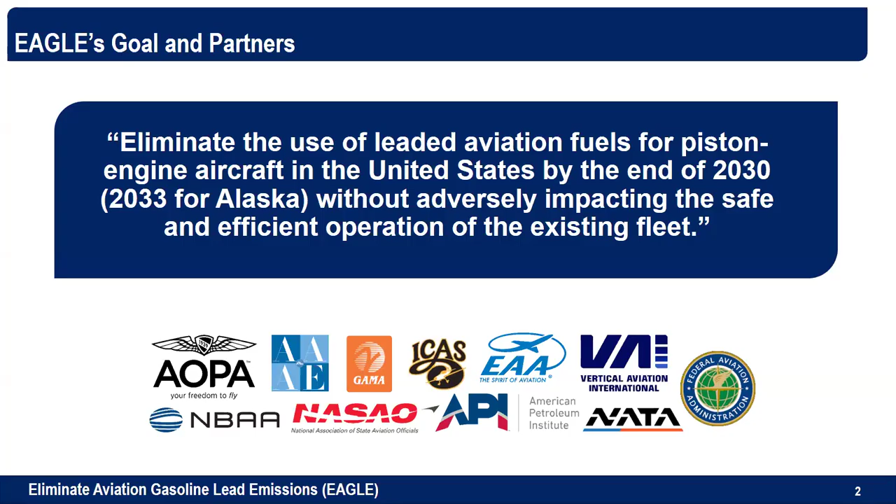When EAGLE was formed in February of 2022, these national partners joined the FAA in agreeing to 4 key objectives: facilitating stakeholder support for development and deployment of viable unleaded fuels, developing technical solutions to mitigate impacts on the existing fleet, informing regulatory processes and policies to safely and smartly eliminate lead emissions, and protecting the availability of 100 low lead during the transition.

FAA reauthorization legislation that was enacted last year made great progress toward that 4th goal by requiring publicly obligated airports to maintain access to 100 low lead through the end of 2030, or the end of 2032 in Alaska.

Although we continue to see state and local actions attempting to prematurely outlaw the use of leaded avgas without a commercially viable replacement fuel, EAGLE's work has helped steer those attempts towards the 2030 timeline, and as an organization, we will continue to do so.

Recently, we've begun to see STC fuels entering the marketplace, mostly in California, where there's a strong environmental focus. Clear communication on FAA processes and coordination with industry have never been more important from our perspective, and the work of EAGLE has never been more relevant, even as we transition to a new administration in Washington.

I'm joined today by industry colleagues from the National Air Transportation Association, NATA, the General Aviation Manufacturers Association, GAMA, the Aircraft Owners and Pilots Association, AOPA, the Experimental Aircraft Association, EAA, and the Vertical Aviation International Association, VAI, all of which will provide technical updates and answer questions on EAGLE's progress towards our mission and key goals.

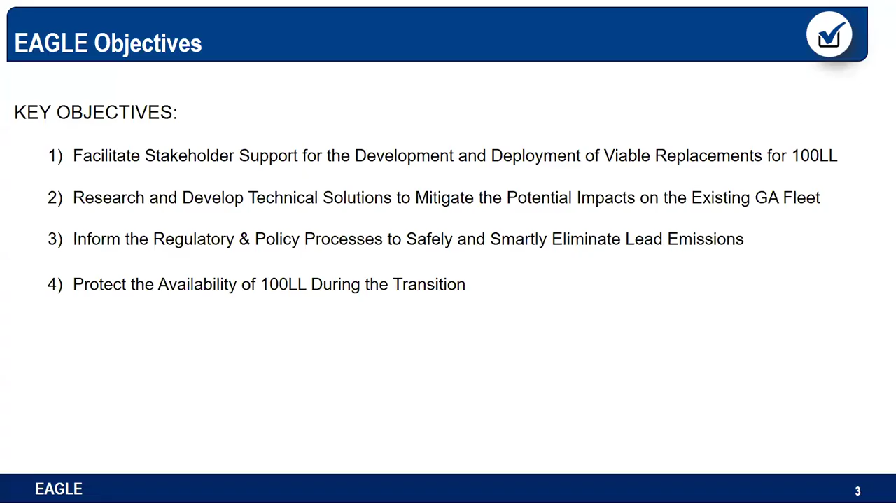I'd like to turn it over now to Rob Hackman from the AOPA, who will highlight the key elements of a viable replacement fuel and the process of a national transition.

Well, thank you, Kurt, and everybody, appreciate everybody joining us here on Saturday. If anybody's interested, I'm drinking Tim Hortons coffee this morning. So hope everybody has a good cup of coffee on their end.

So with that, Kurt mentioned we're working towards a viable unleaded replacement for 100 low lead. What does a viable unleaded replacement mean? It may mean different things to different folks, but first and foremost, it has to ensure safety. We have to maintain the safety for the engines and aircraft as we transition to any new fuel. That needs to be paramount, and it needs to be a fuel that is acceptable for use in the industry.

Part of that also has to take into consideration the production and distribution of the fuel. This has to be a solution that works across industries for the petroleum producers, the supply, distribution, the end users, consumers, and the like. And for the consumers, a big part of that obviously is the economic consideration of any new fuel. Not just cost per gallon, but what does it cost to transition to the fuel?

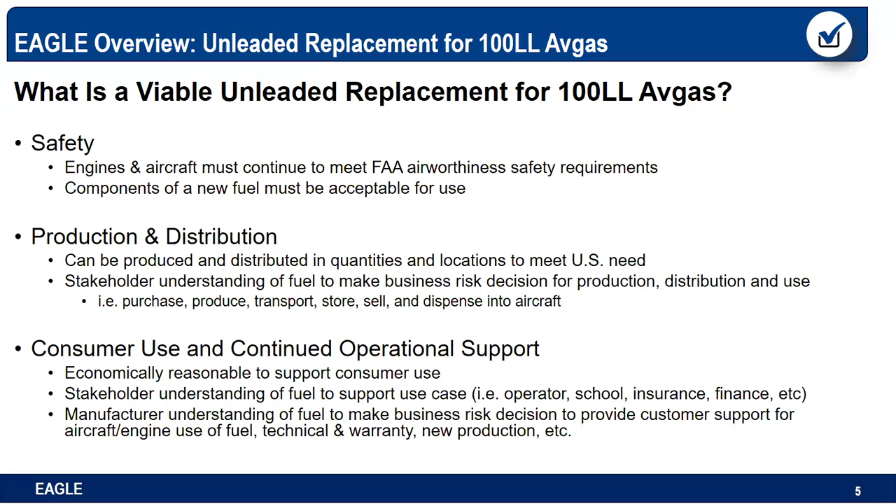In order to do that, we need to make sure that we have good stakeholder involvement and stakeholder understanding of any of the new fuels. Also needs to include all the users, flight schools, fleet operators, and the like. And our manufacturers, our OEMs, our aircraft engines and airframe manufacturers need to have a good understanding of the fuel in order to be able to support new production, to be able to support technical questions that come up, and warranty issues as well. So those are some of the key concepts that go into determining what is a viable, or how we define a viable and unleaded replacement fuel.

To give everybody kind of a visual as we get into this, we're going to go into a lot of detail into each of these sections, but this is a visual presentation of what we're talking about and the pathway that we're working on to undertake this.

It all starts with the fuel developers. The fuel developers are the key to seeing what new fuels are available to us.

The FAA provides two different pathways for fuels to become authorized for use in our aircraft. We're going to spend a lot of time on both of those pathways today and give you updates specific to each of the fuels pursuing these pathways.

The first pathway is the fleet authorization pathway. This came about in 2018 in the FAA reauthorization bill, which authorized the FAA to issue fleet authorization without an applicant for a new fuel's approval. This realized that new fuels coming forward may be coming from sources that were not traditional to the certification process, such as fuel producers and the like.

So this allows the FAA effectively to be an applicant. It relies heavily on the PAFI testing, the Piston Aviation Fuels Initiative, which you'll hear more about in just a second, and also the industry consensus standards process, the ASTM production specification, to get the peer review for the process. That results in a fuel being issued a fleet authorization. We'll talk about what that means to each aircraft owner and the maintenance folks here.

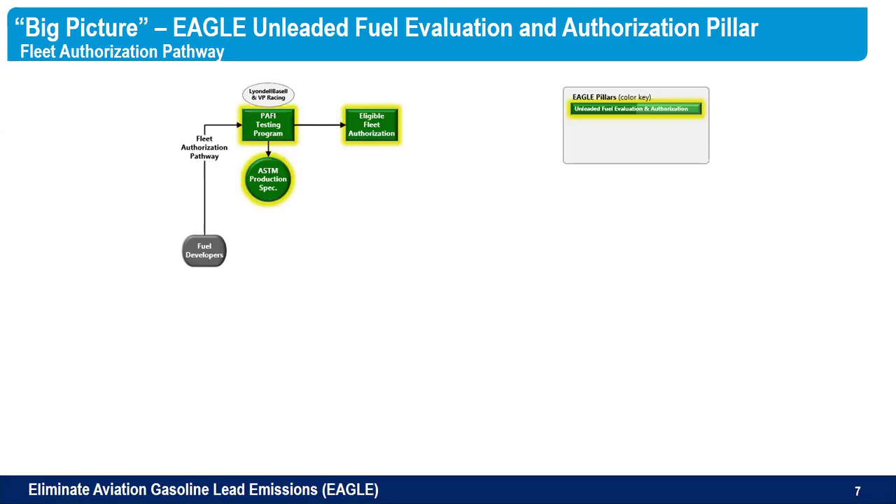The second pathway is the traditional pathway, the existing type certificate pathway. In this case, a supplemental type certificate as a change to add a new fuel to aircraft. This relies on the STC approval process, which is a proprietary process agreed upon between the FAA and the applicant. More detail on this to come.

It relies on either an ASTM production specification or an independent specification developed by the company. In either case, the specification has to be accepted by the FAA as part of the STC approval process, resulting in a supplemental type certificate. What we're seeing is what is called an approved model list supplemental type certificate. So instead of an STC issued for each make and model, it's a large approved model list that includes many airframes and many engines - an STC for both the engine and then an STC for the airframe itself.

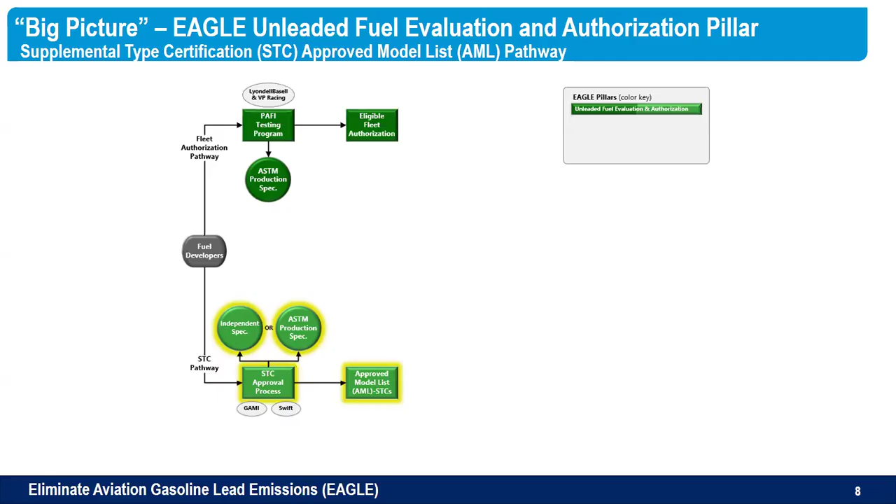From there, we get into the owner-operator and the approval process. In either case, the fleet authorization or the STC pathway, both result in something that needs to be installed on the aircraft. In the case of the STC, most folks are familiar with installing an STC onto an aircraft. Whatever modifications need to be made as part of that STC, including manuals, aircraft manuals, fuel placards, those types of things - you're purchasing that STC from the STC holder and then installing it per the directions.

In the case of the fleet authorization, you will also be installing that authorization. Similarly, it will include fuel placards and flight supplement manuals for the new fuel and any other modifications that need to occur. In this instance, the FAA will be issuing it - you will not have to purchase it, being one of the main distinctions. In both cases, any aircraft modifications that need to be considered are part of those directions. In the case of the fleet authorization, there will be additional information provided for the experimental amateur built community to help them transition to a new fuel.

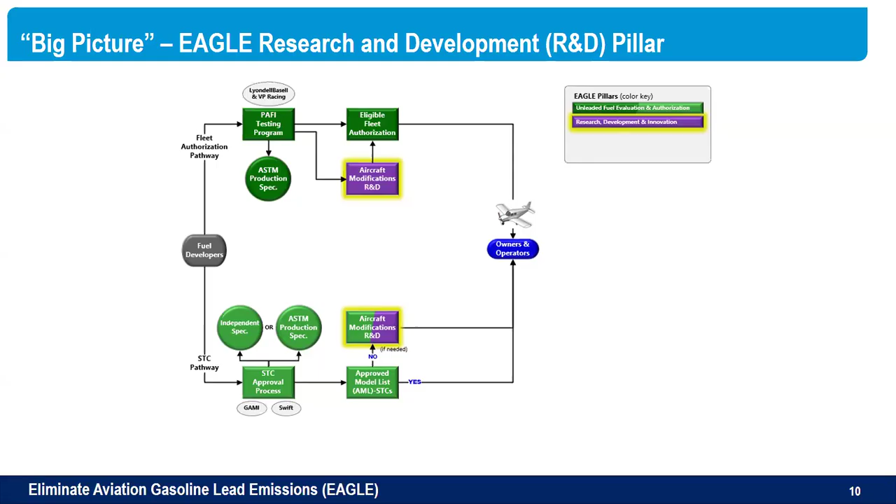A key component, as we mentioned before, in determining a viable fuel is ensuring that production and distribution is also considered throughout this. So as the development of the fuels is going on, as the authorizations of the fuels are actually being worked through, producers and distributors need to be a critical component of this.

In the fleet authorization pathway, they are part of the group developing the test methodologies, the PAFI testing and the like, and are kept in the loop through the ASTM process, as well as the ASTM production specification being developed and balloted through the process. So the producers, distributors, FBOs, and the like are kept informed as to progress being made and information about the fuel development.

In the STC pathway, it's still critical that this happens, but it relies on the STC applicants, who are working with proprietary information between the FAA and the applicant, to go out and keep the producers, distributors, and FBOs informed. So one is a bit more of an open and collaborative process, and one is designed to be a bit more of a proprietary process.

We have one fuel working through the fleet authorization pathway that we'll have an update on today - that's the LyondellBasell and VP Racing fuel. We have two fuels working through the STC pathway - that is GAMI, General Aviation Modifications, Inc.

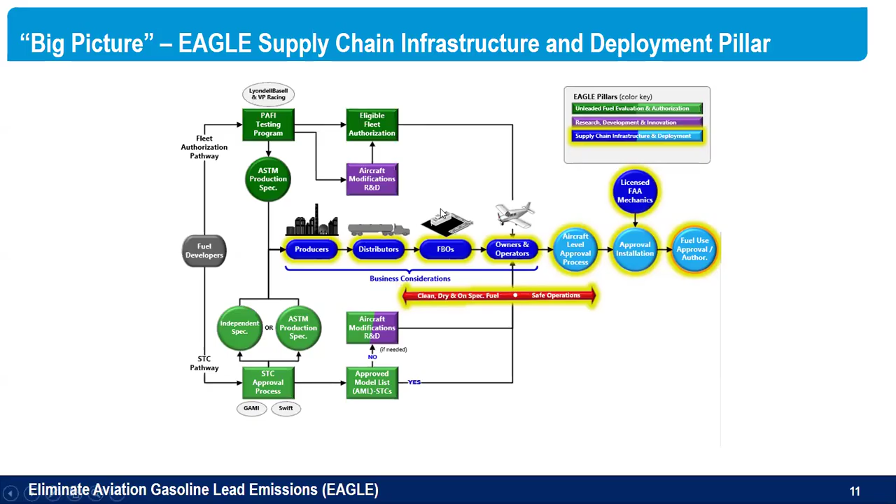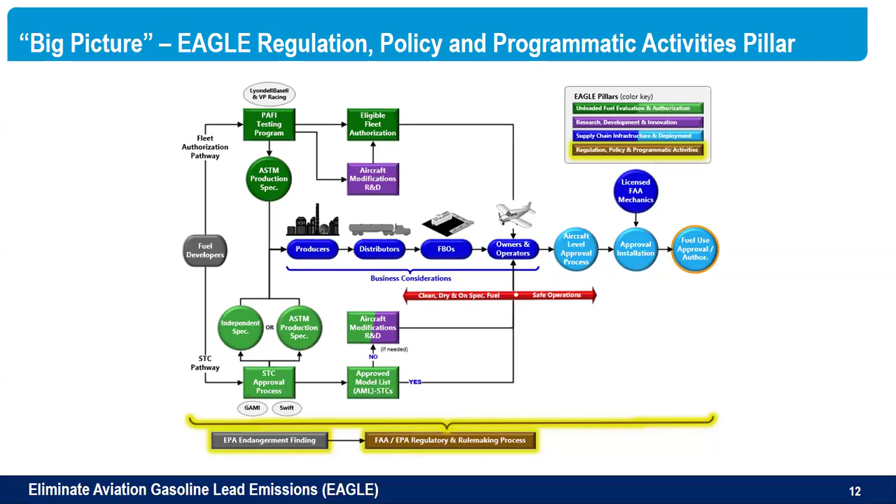As this is working through, at the bottom you'll see the EPA endangerment finding and the FAA/EPA regulatory and rulemaking process underway. As most folks are aware, the endangerment finding has been issued, so now we're working through any potential future FAA and EPA rulemaking that will come out of that. We're anticipating that over the next few years. We're working collaboratively with the FAA through the EAGLE process, and they in turn are working with the EPA as it moves ahead. That's intended to give an overview of the process, a visual you can keep in the back of your mind.

At the end, once the approvals are issued and installed on the aircraft, we'll talk a bit about the responsibility for maintenance in the field. Obviously, the last thing is a strong continued operational safety environment as any fuels enter the field, to ensure we're addressing any issues that arise. That's a key component.

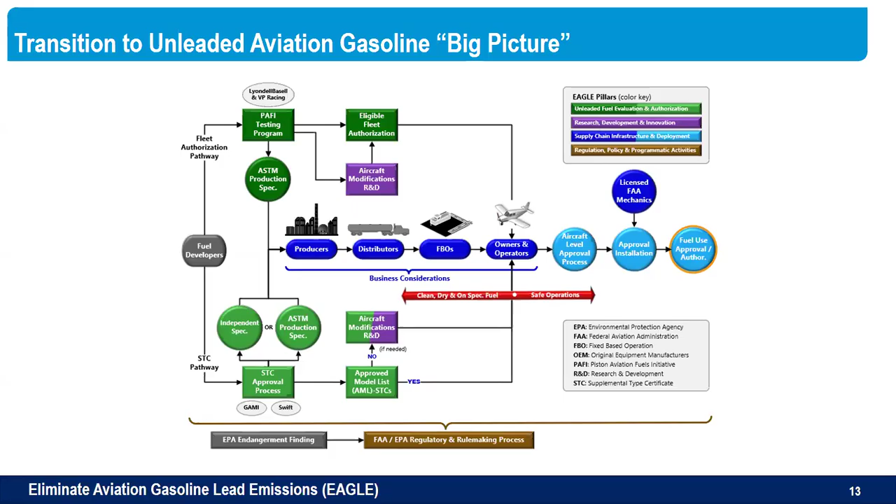We're going to spend the next 45 to 50 minutes going into detail on each of these. I think that's what a lot of you are actually interested in. The first thing we'll talk about is those two pathways and what some of the key differences are. I'm going to bring in Walter Desrosier from GAMA to join us, and he and I are going to tag team a little on the various fuels.

Walter, what are you drinking this morning? Coffee? All right, well, good morning everybody. I am originally an A&P mechanic, so my focus is on high-leaded, high-test coffee. I drink a dark roast Starbucks black coffee, no sweetener added. But good morning everybody, welcome, and I appreciate the opportunity to walk through and talk through some of these issues with you.

So Rob talked about, on the big picture chart, the different pathways by which you can obtain FAA's approval or authorization in order to use a new fuel. One thing to highlight is the FAA's focus and emphasis is on the safety of the engine and the safety of the aircraft, ensuring they continue to meet all applicable airworthiness requirements. That's what the FAA is focused on as part of those processes.

There are two pathways, as Rob said. One is the supplemental type certificate process, the traditional process on how we do all our modifications and alterations for major change on aircraft through the type design process. As he mentioned, there are two applicants. I'll talk a little more about their status and where they are going through that process.

The second one is relatively new and unique to fuel. Congress passed authorization allowing the FAA to recognize that in this area of fuel, most of the expertise and all the development is done by the fuel, petroleum, and chemical companies in industry, and they're experts in that field, but they are not product development and aircraft certification experts with the FAA. So there was kind of a gap in terms of their ability to invest in the development of potential candidate fuels that could be considered for use in engines and airplanes.

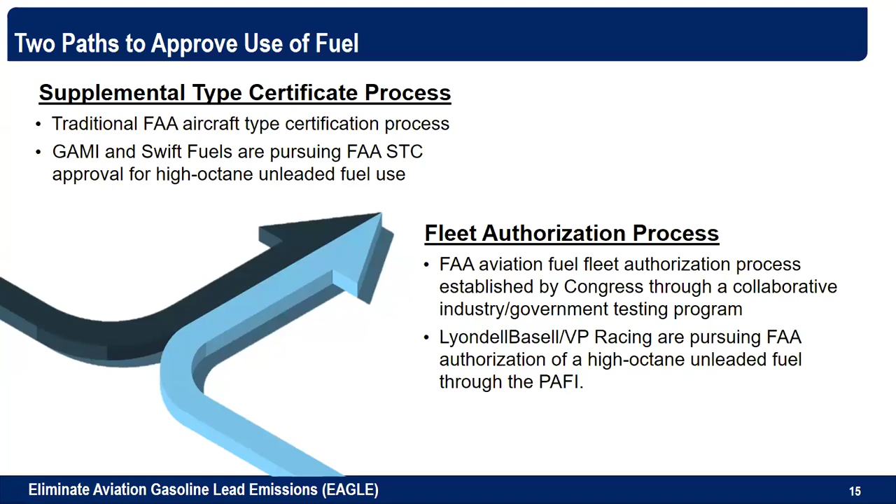So in that process, Rob mentioned that a supplemental type certificate is just like every traditional type certificate process under the FAA. It is a proprietary applicant working directly with FAA. They make application just like a traditional manufacturer does. GAMA members that make Cessna airplanes, Lycoming engines, make application directly to FAA. Those are proprietary activities where they engage. The traditional certification process requires that the applicant show compliance to all the requirements necessary for safety to meet the airworthiness requirements, for example, Part 23 airplanes, Part 33 engines. But the applicant controls the visibility of all the required tests, evaluations, and assessments they do to show compliance. FAA does their traditional certification process, reviews that documentation, and makes a finding that the applicant has shown compliance to issue the FAA design approval, whether it's by TC, amended TC, STC, or in this case, the AML STC.

The applicant then can choose and control the visibility of all their data, what testing they did, how they showed compliance. That is all applicant proprietary data that they decide how they want to share and communicate and provide visibility to. Likewise, if they're using a company specification as part of their STC, this is the independent specification, then the applicant controls the visibility and availability of that as part of their design approval.

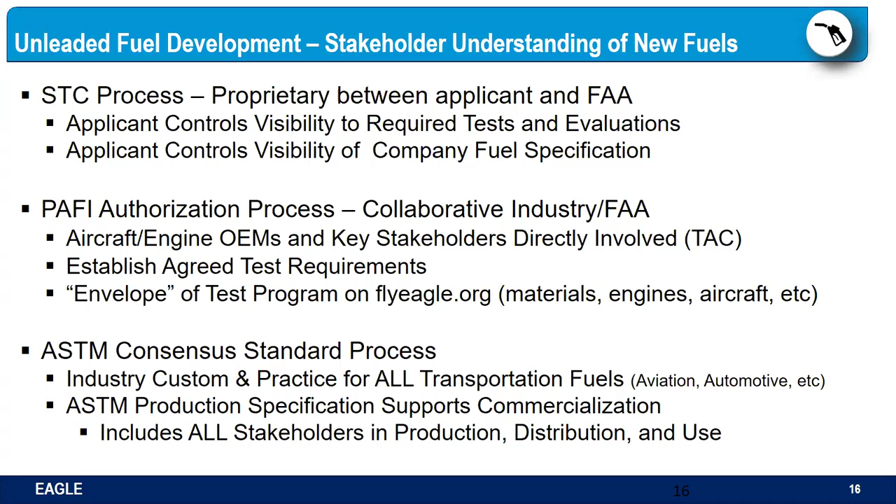And the only time that we used the STC process from a fuel standpoint widespread was the introduction of autogas, and that was for a portion of the fleet, not for the entire fleet. UL94 has an STC approval as well. But manufacturers also do approval of new fuels through their respective processes as well.

So one of the elements we also wanted to talk about, it's not just about the test and evaluation and the authorization and approval of the FAA for the fuel itself to be used in engines and airplanes. One of the important aspects is the importance of it being installed on the engines and aircraft that it's intended for.

This is an important part of the FAA's traditional process in terms of ensuring the continued safety of the fleet. So for a fuel that is approved and authorized through the traditional certification process, an AML STC is issued for the fuel. Every AML STC or multi-model STC does include a limitation in it: the installer must determine whether the design change is compatible with previously approved modifications.

Now, the reason that's important is that as part of the type certification process, you have to have a known configuration that you're assessing and evaluating. So when they did the STC, they evaluated the base configuration of a type engine and a base configuration of a type aircraft and determined that it would be eligible and safe to operate.

It is not possible to take into consideration how many different independent third-party modifications and changes might exist out there. And so the original STC as issued is only going to focus on the base configuration. This is the standard method and mechanism for installing changes on an aircraft.

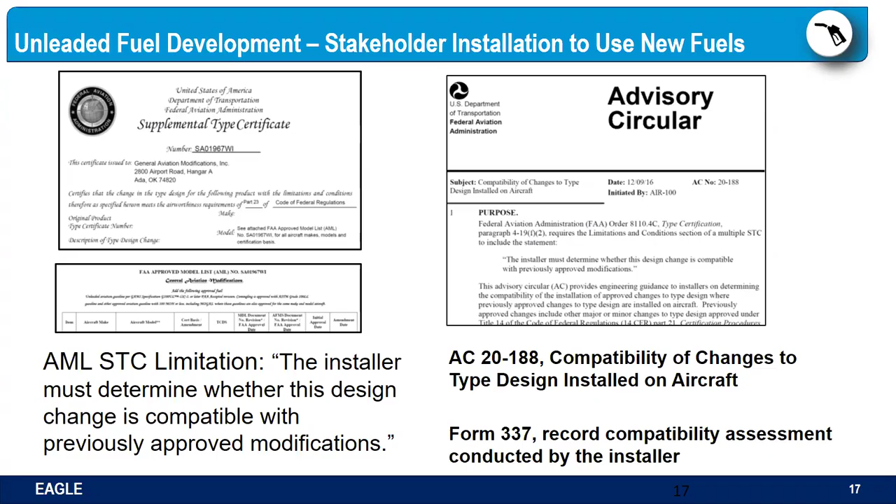Now those will be done by field approval or by some kind of minor or major alteration. However, if it rises to a certain level, it might require an additional STC or a change from a type design perspective. The fleet authorization is envisioned to provide a bit more information and perhaps additional input for these folks. So thank you for that.

So I talked about how there's broad industry and FAA engagement in developing the data as part of the fleet authorization. That data is generated, encompasses a lot of information, and supports two things. Fleet authorization does require an ASTM specification, so the data generated provides support for those reports to be reviewed by all the stakeholders in the consensus standards process of ASTM.

And through that process, the peer review will provide additional input and understanding on the fuels, and might request additional data to be generated or substantiation to be developed. But as part of that process, the FAA also uses all of that data that comes out of the PAFI testing and the ASTM consensus and peer review process to make its determination on aircraft engine and aircraft eligibility.

So what the FAA will do, once they've determined they have a viable replacement fuel based on all the PAFI testing, the ASTM consensus process, and stakeholder support and approval of a production specification for a new fuel, the FAA will then generate - based on all that data, just like an STC - a determination of the applicability of all the airworthiness requirements for the engine and aircraft to meet safety requirements.

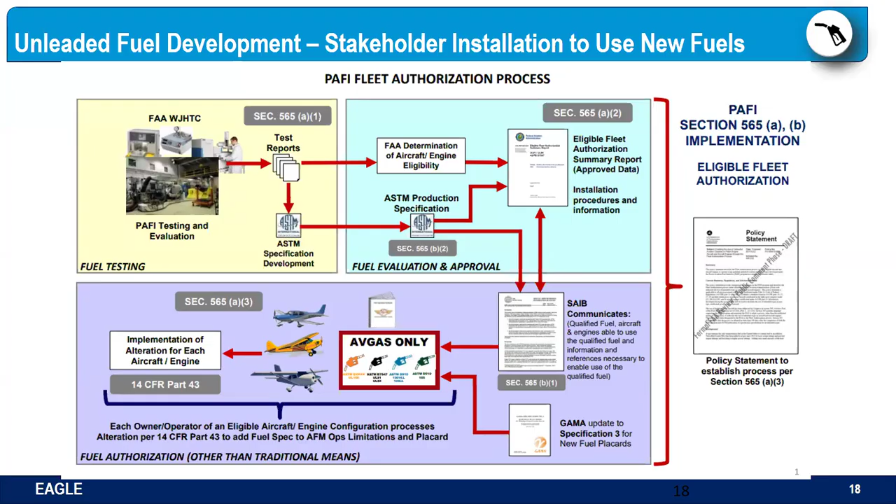So Walter, we're going to move into the next phase here, where we talk about the fuel applicants and give an update on each of the three. Just as a reminder to everyone, we have two fuels working through the type certificate or supplemental type certificate process: GAMI with their G100UL and Swift with their 100R. And then we have a fuel working through the PAFI fleet authorization by the FAA, which is the VP Racing Lyondell Basell VP Racing fuel. So we're going to give an update on the status of each of these three.

So I'm going to start with the STC fuel. As Rob mentioned, GAMI has obtained an STC, AML STC approval and authorization for the use of G100UL, which is their trade name for that new fuel. The current STCs that have been issued, you see the STC number on the screen there.

But for every fuel, there's going to be two approvals needed. You need an approval to change the limitations on the engine, authorizing it to use a new fuel, and you need an approval to make a change to the aircraft limitation, authorizing the use of a new fuel. So there are two AML STCs that have already been issued to GAMI. They are very broad in terms of a fleet. The Part 33 engine AML, as reported, basically includes all spark ignition reciprocating engines. I haven't done a side-by-side comparison to every single type certificate the FAA has ever issued, but it is a very, very broad AML STC in which GAMI has shown to the FAA that they've got the data that helps support that, and the FAA has issued that STC.

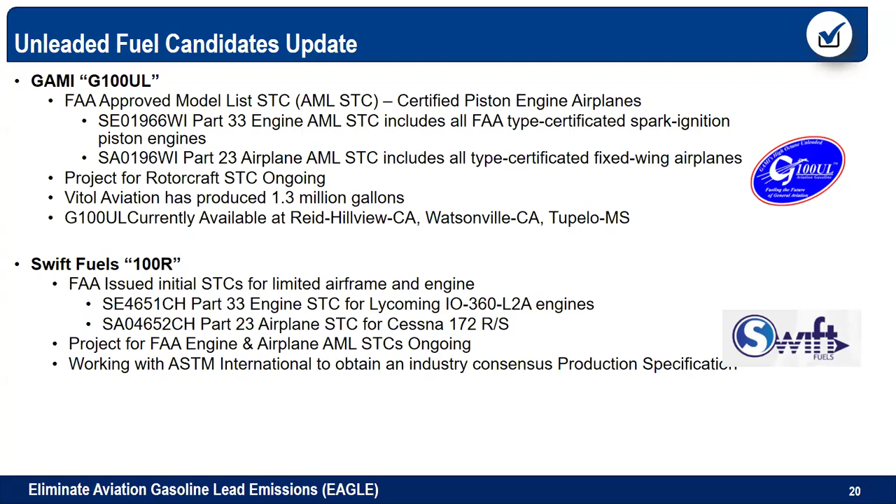In terms of Lyondell Basel VP Racing, they have a candidate fuel that they're developing, putting a lot of research and development into like the other companies, but they are not a traditional aviation company. They're not somebody who has done FAA certification projects. They're not an organization that has made application to the FAA for any kind of STC in the past.

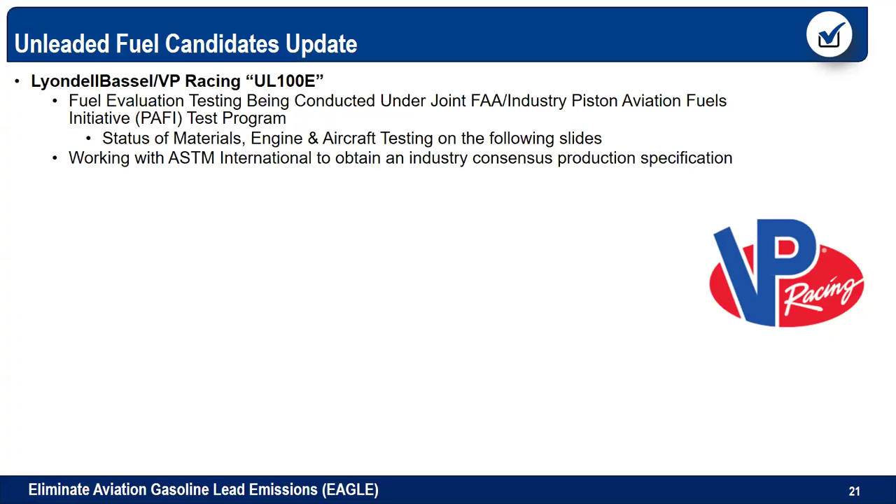So they're pursuing the pathway made available under the fleet authorization. And that's exactly why that process exists, to support the developers of fuel, to bring them in and invite them with a pathway to market to invest in development of something for general aviation. They're going through the PAFI program and the test program. Because we're involved as stakeholders in that program, we do have a lot more details on that, so we're going to go through that process a little bit to provide some understanding and visibility.

Yeah, so it is something, Walter. I'll give you a chance to grab a drink there.

So we do have a lot more visibility into this. This is the Lyondell Basel VP Racing UL100E that is going through the fleet authorization process, which utilizes the Piston Aviation Fuels Initiative. This is the program whereby the testing was defined by a collaborative effort through the manufacturer, the users, the community, to put the program together to determine the envelope that needs to be tested to understand the parameters of the fuel. The testing itself is being done either by the FAA or overseen by the FAA as part of the PAFI program. So folks were wondering where the fuel is actually being tested - we'll show you here in a little bit where fuel is going out to and give you a lot more detail on this particular fuel.

Thank you, Rob. So in terms of the PAFI test program, that test program was developed in cooperation between stakeholders, primarily aircraft and engine OEMs, but other stakeholders involved in the aviation fuel process, and the FAA. There's some initial gates in terms of eligibility. We've had over 26 fuels come into the PAFI program over the years, go through some of those initial assessments and evaluations. Based on some of the experiences and lessons learned in that process, we've strengthened the program to do a quicker job at identifying critical characteristics in testing new candidate fuels that come in. So that's what the program is set up as today.

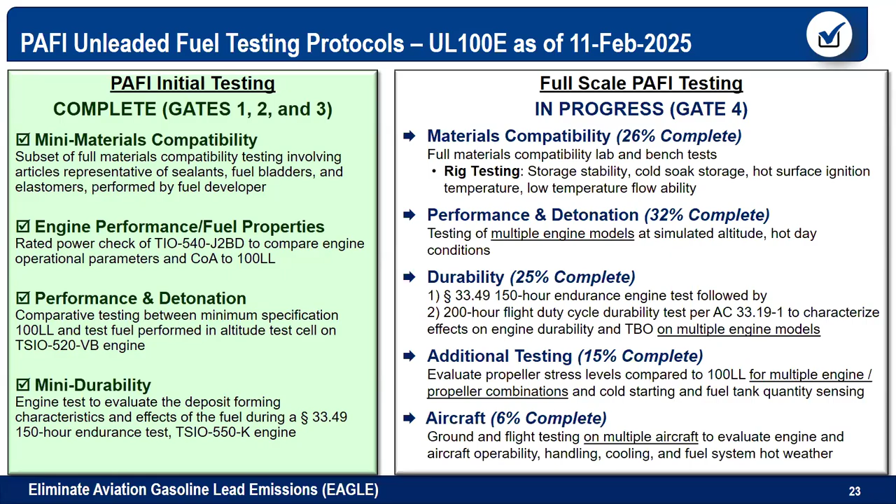They are now in gate 4, which is full-scale PAFI testing. And we're going to do full-scale materials, performance and detonation, durability, some additional testing, and some aircraft testing. So this kind of has a summary and shows a percentage complete, but our next slide shows a graphic representation that really is telling in terms of the comprehensiveness and the scope of that evaluation and assessment.

Likewise, below that, you can see the durability and performance category. That's where we take a lot of new components and constituents in these fuels - we don't know exactly what the performance might be when subjected to the extreme temperatures and the extreme limits of demands that are put on aircraft engines.

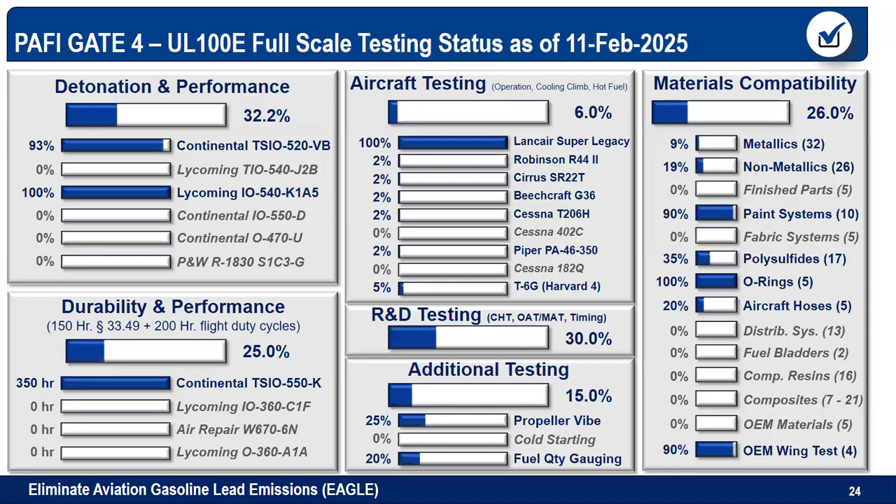Under the PAFI program, we've done as comprehensive an approach as we could in bringing together inputs from across all the manufacturers and from across the other stakeholders involved in the distribution chain to identify all of those materials that we think would be key contributors needing assessment.

As I mentioned earlier, all that data is generated, and it feeds into the FAA determining an eligible fleet determination, feeds into the consensus standard process for an ASTM production spec. It also feeds into those areas where we identify a potential impact. Say there's a material where we identify a potential impact - it feeds into one of the branches that Eagle has, an R&D area of activity. If we identify anything in the fleet that might be impacted by one of the characteristics we identify in a test for our fuel, we're then going to use that data to support an additional level of work to generate some kind of mitigation or solution.

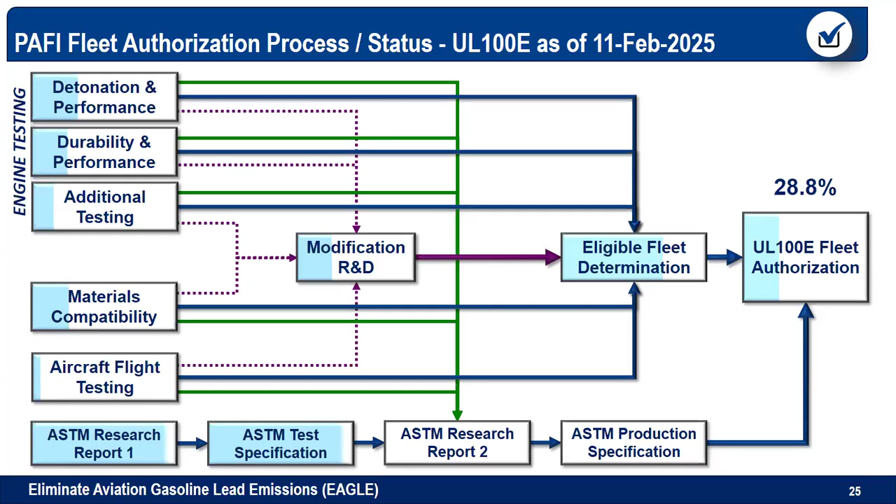It might be a change in operational characteristic. It might be a change in material. It might be a coating that you put on certain materials, or it might be information to support an additive to be added to the fuel. But if there's an impact anywhere, that's part of the Eagle process and part of the PAFI test program - to feed into understanding a potential impact and how we address that.

We talked about who is actually doing the testing, overseen by the FAA. So I mentioned we're just starting the aircraft full-scale testing, and all of that testing is being done as an in-kind contribution by the different aircraft OEMs. On the chart here, you see all the OEMs directly participating, plus the FAA's William J. Hughes Tech Center, plus Embry-Riddle Aeronautical University as a participant doing some work there, plus an air carrier, Cape Air, doing some of their commercial piston-powered airplane testing as part of their program.

And then NRC Canada is actually doing the radial engine testing, and Hartzell Propellers is doing the vibration testing. So you can see notionally, this shows approximately how many gallons for each of those tests, and the scope and size of the test, depending on how many aircraft each of them is testing.

This goes to show the extensive cooperation across industry with the FAA in conducting the testing and support, but also the comprehensiveness of the test in terms of the volume of fuel needed to do the evaluation and assessment of these new fuels.

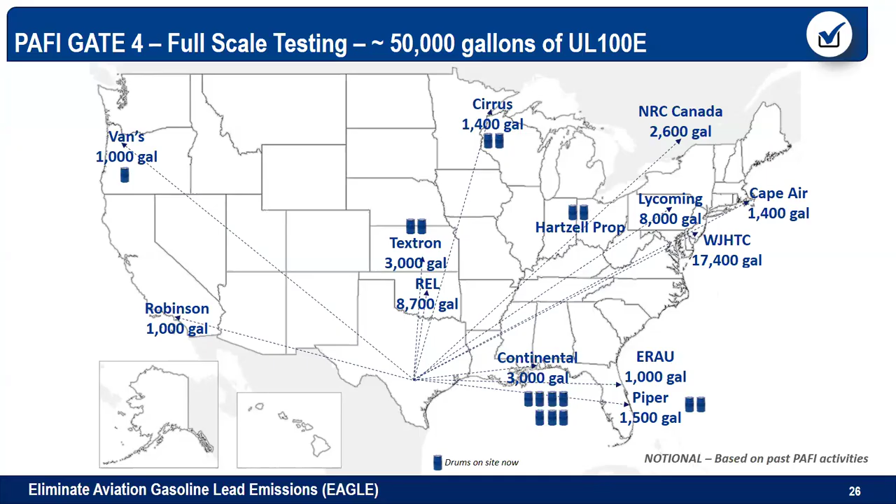Walter, we talked about materials compatibility. All of these materials we're going to show here, this entire list is available at flyEAGLE.org, but it highlights the extensive areas we're looking at from a materials compatibility standpoint and the work actually being done. So you're seeing paint system.

I also wanted to highlight for our amateur built community, a number of these materials are not necessarily found in production aircraft. They were added. The group that put together the testing includes a kit manufacturer, a number of kit manufacturers, as well as outreach to other manufacturers of amateur built aircraft kits. So we're including that in there.

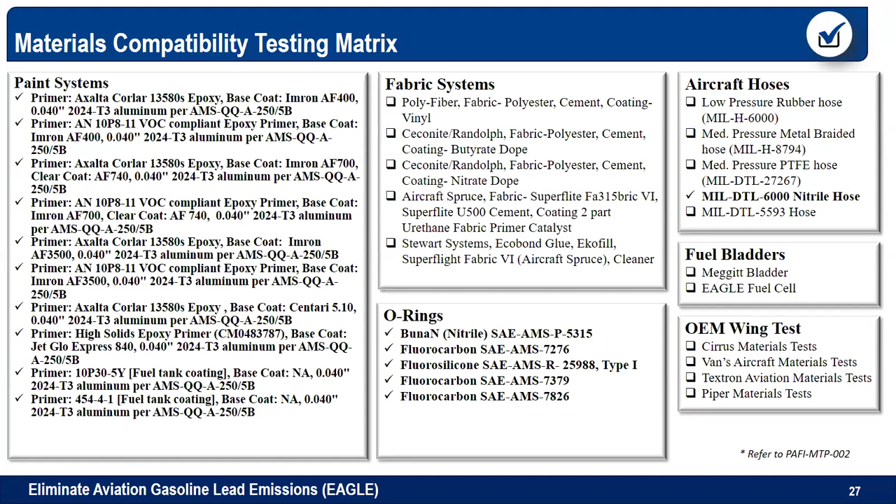So you see paint systems, fabric systems, hoses, bladders, O-rings. On this next one, the metallics, the non-metallics, a lot of OEM parts, finished parts. We also go through polysulfide sealants, a lot of our tank sealants, a lot of our different materials. So these are all being tested.

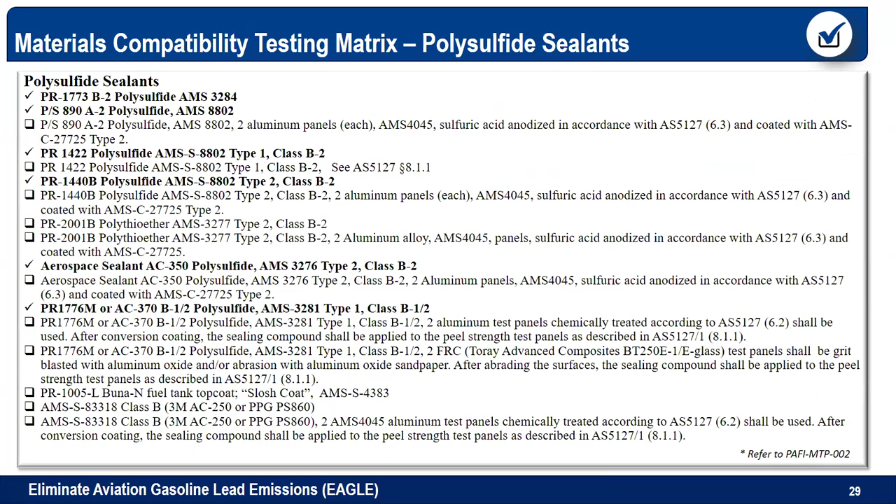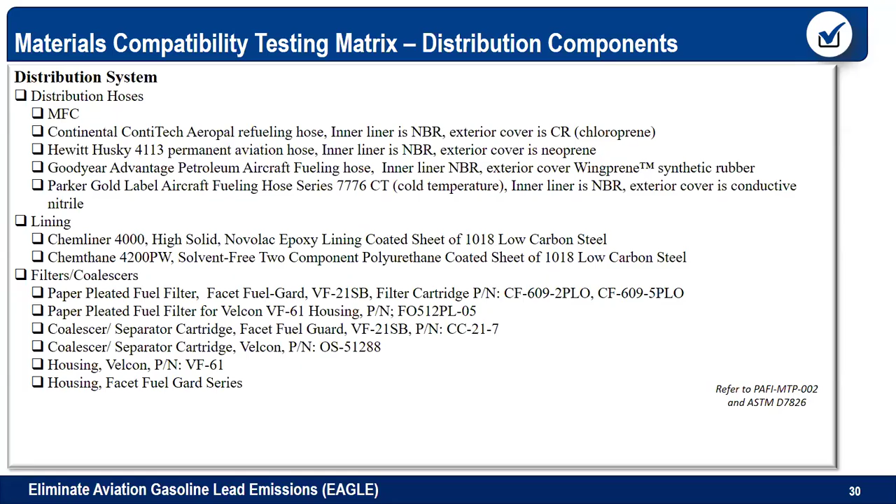Additionally, for our folks over in the distribution system, we're including distribution hoses, linings for tanks, for trucks, filters, and coalescers that are found throughout the fuel distribution system as well. Remember the Eagle process - a fuel had to work not only in production, but also in distribution and in the aircraft. So this is the testing that's actually being done to be able to do that.

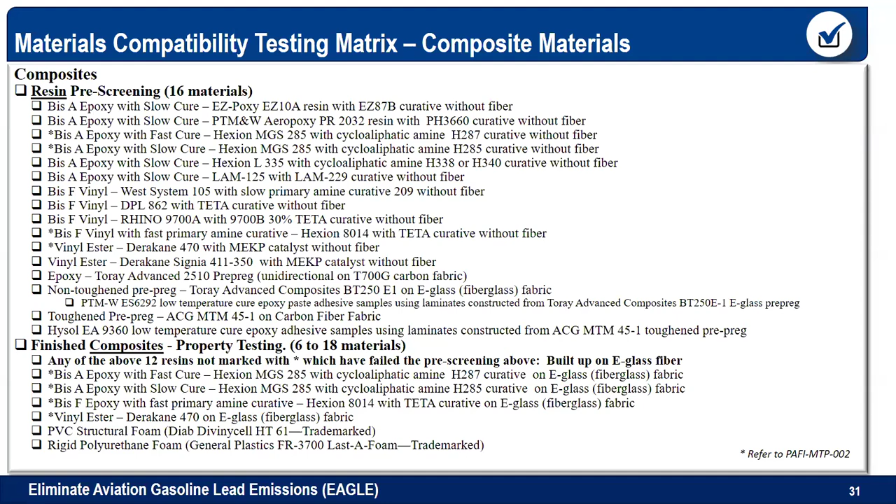And then for both the production OEM side, the TC world and the non-TC, type certificated world, a number of composites are being addressed as well. So a very extensive list. I flashed through it pretty quick - flyeagle.org, it is available there in this format, and hopefully in the near future will actually be in a little bit more of an interactive form. But that's also where you can go to check on the testing itself.

So we've got about 14 minutes left here. We're going to bring in Karen Huggard from NATA to talk a little bit about the fixed base FBO and distribution perspective. Good morning.

I'm Karen Huggard, National Air Transportation Association. I am drinking a whole lot of espresso with some hot milk. I've got 5 shots in here. I make it every morning so that I am highly caffeinated and ready to go.

That'll help because I need to talk fast since we're running short on time. I'm going to go through this really quickly - just a high-level overview of Eagle's work to identify and engage stakeholders throughout the avgas supply chain. All of this data we're amassing through Eagle will be used to support a national coordinated transition to unleaded fuels.

So we've identified and will be coordinating with more than 800,000 stakeholders in the following categories: 4 unleaded fuel producers, more than 15 general aviation fuel distributors, approximately 3,500 fixed-base operators, more than 600,000 general aviation pilots, and 250,000 aircraft mechanics. Together, these stakeholders will deploy unleaded fuels in a fleet of more than 230,000 GA aircraft, including both certificated aircraft and more than 30,000 experimental aircraft.

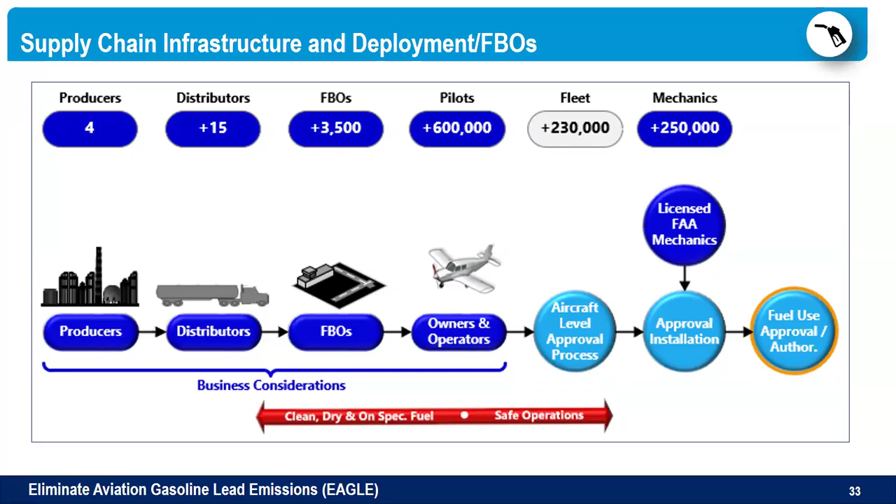When I talked about certification, that really is the core process for manufacturers in terms of ensuring and understanding the airworthiness and the safety. There's going to be a lot of big business decisions made by all the stakeholders involved in supporting, distributing, dispensing, and using a brand new fuel. It goes back to the importance of transparency and understanding, because these organizations and businesses have big business decisions to make in terms of supporting deployment of a brand new fuel, understanding what that fuel is, taking on business decisions for investment, risk, and liability.

For manufacturers, there's been some coverage and confusion: well, wait a minute, if the FAA approves a fuel, what's this about whether the engine manufacturer approves a fuel, or the aircraft manufacturer approves a fuel? The answer is yes.

Every individual engine manufacturer does issue their own acceptance of fuels. They do it first as part of the ASTM consensus standards process, and by participating in that peer review process, there's collaboration and understanding across all stakeholders, and ultimately they vote in support of a new production specification, showing their confidence and support for a fuel.

As individual manufacturers, they then also have to determine how they communicate to their owner-operators and customers about their perspectives on using a new fuel. By having that understanding, they're able to do that.

The additional thing is the manufacturers themselves will issue their own approval. So Lycoming has a service instruction where they publish their approved authorized fuels for their engines. Textron Aviation does the same for Cessna and Beech and other OEMs. That's how manufacturers of engines and airplanes communicate to their customers that they not only endorse and support the fuel, but can continue to provide continued airworthiness support and warranty support for engines and airplanes modified by owner-operators to use a new fuel.